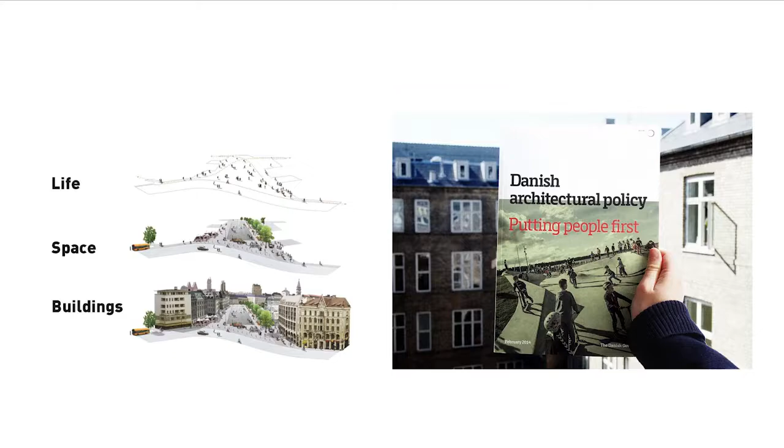A lot of that is due to Jan Gehl's well-known approach to city planning: life, space, buildings. It's important to say this isn't just a phrase for us, it's an approach now embedded into the first Danish architectural policy launched back in 2014, with the striking title 'Putting People First.' That really is at the core of what we do.

When we talk about architecture and not just city planning, it's always about city life or urban life - what kind of life do we want to create spaces for? Then we plan the spaces, and only after that do we start talking about the architecture of the buildings and how they can support the other two. Always in this order. If it's done the other way around, it'll never work. Trust me.

So these are three things at the core of everything our office does, and hopefully you'll see that today. The journey I'll take you on goes a little bit back, showing some projects from some years back, then touching on tall buildings, contextual tall buildings, timber, and finally adaptive transformation, which we're looking more and more into - not just us, but all of us in this room, since this is basically what most architects are going to be busy with for the next part of our careers.

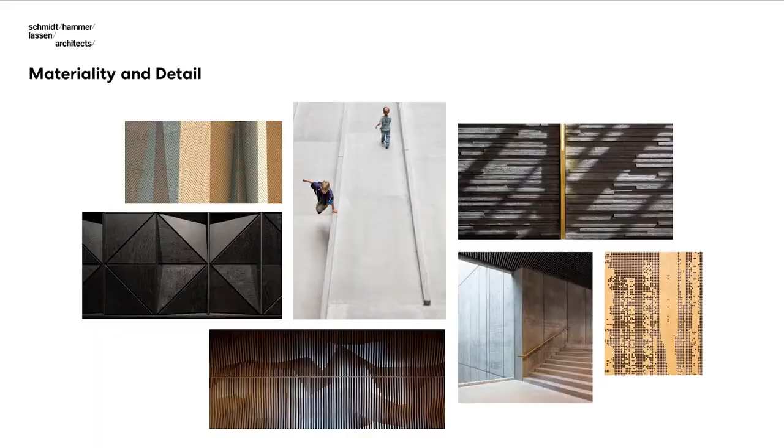I don't know if it's our Scandinavian upbringing, but one of the things I find hardworking here in North America is the split between a design architect and an architect of record. We truly believe the devil lies hidden in the detail, that architecture doesn't stop after the concept or schematic design, but needs to be brought all the way through to the very end.

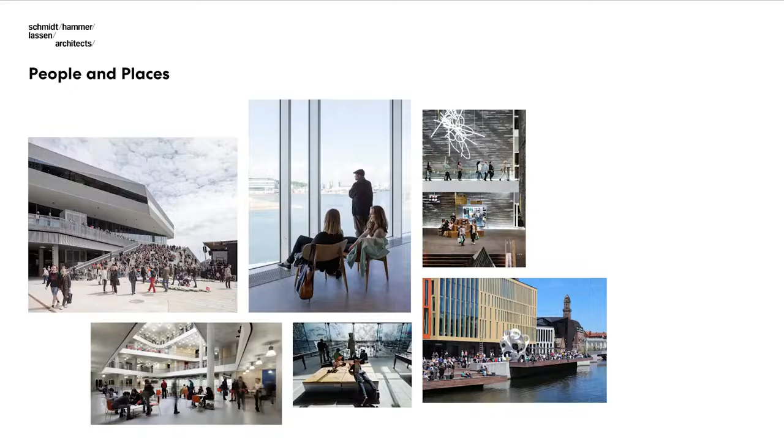And then, last but absolutely not least, the idea of creating spaces for people. As Jan Gehl again said, the good city is like a good party - it's where people want to stay a little longer. And the fact is that the biggest attraction for people, in the end, is other people - not architecture, not parks, but people.

So design as an ecology - this wraps up what I was just saying, the way we look at these different stages, both about social infrastructure and how architecture can become a means or mediator to create spaces that bring people together.

We say 'operational' here, but really we're talking about adaptive transformation - how can we work as architects within existing buildings and structures - and an environmental approach, of course, looking at new materials like timber, which I'll show is far from new, but actually one of the oldest building materials we have, and one of the most sustainable and long-lasting.

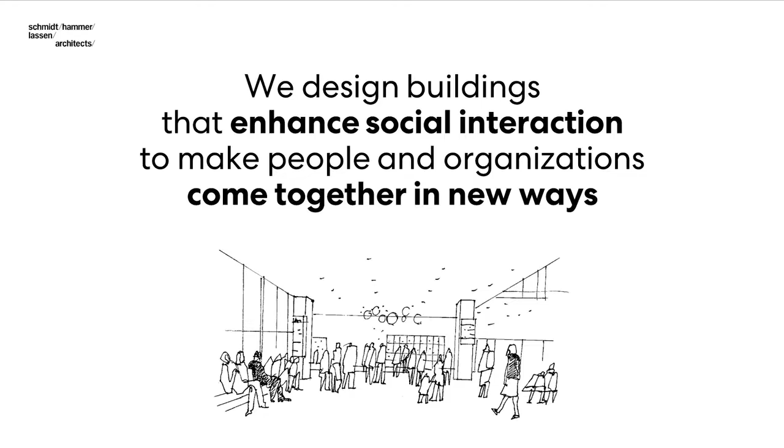So the first part here is about the social mediator, if you will - something we live by, the idea of using architecture to design buildings that enhance social interaction. That's what we want them to do regardless, as I'll show, of the building's function. So we work not just with cultural buildings, which normally have the advantage of being open to everyone, but also with private clients, trying to make them understand that by creating public spaces and interaction, they will also increase the value of their buildings, of their architecture.

Traveling back a bit, this is a project - a competition we won back when I just joined the company, one of the first projects I actually worked on: a competition back in 2000, the Aarhus Museum of Art, in the city of Aarhus, where we founded the company.

The competition was to create a new art museum - it was an open call with more than 300 entries. There was an art collection in the city that was far larger than the space they had, and our approach became very pragmatic.

There's the famous architect Arne Jacobsen's city hall up here and the park, and the old city park and the old museum. The site was right here, and most of the entries created a classical museum-like structure with a cascading series of rooms that one led to another.

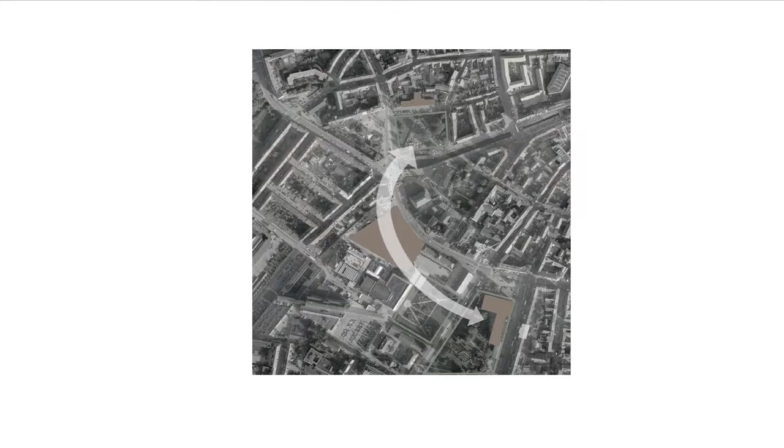We wanted to try something different and said, what if the museum became the mediator of urban space? So we tried to do the project as compact as possible. We went as low as we could, and as tall as allowed by the local area plan or zoning plan.

Basically we said, let's take a road and take it straight through the building, making it a public shortcut that goes through the museum. So we have this monolith that reflects the brick architecture you see in the rest of the city. It's kind of hovering, but it picks up people and takes them right through this street that cuts through the museum.

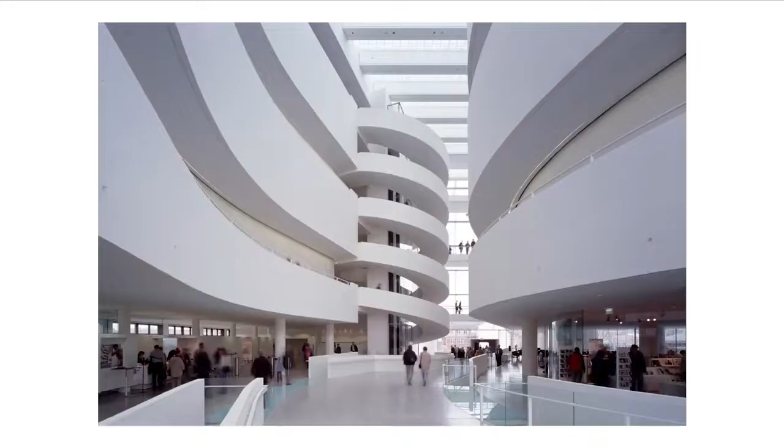So this is a free route, and the idea was that if we put public art on display along that route, it would create a space of interaction where people come in, see the art, get intrigued, maybe buy a ticket, visit the museum, sit in the cafe or bookshop. It became more than just this highbrow, elitist, culturist institution of an art museum—it became a cultural hub.

This creates the notion of people just passing through, people going into the museum, but also—obviously inspired by the light architecture of Frank Lloyd Wright and the Guggenheim Museum—the dynamics and motion of movement inside, people traveling from ground floor and up, also became part of what was on display inside the museum.

And when we won the competition, one of the ideas was also that we wanted to activate the roof and do some sort of sculpture park up there. At the time when the building was done, the funding was not in place.

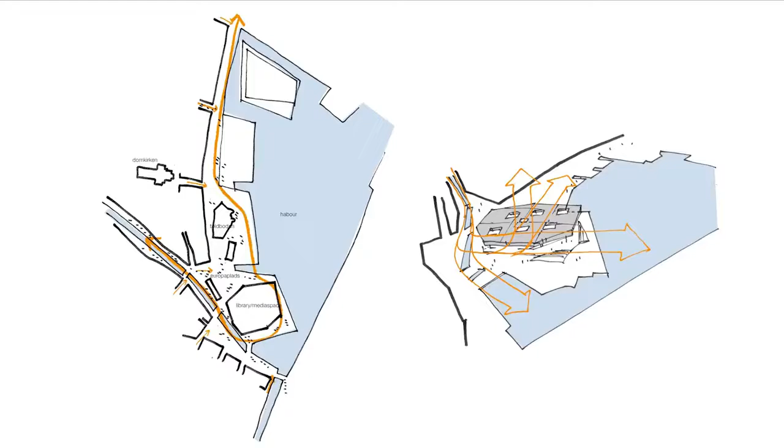So it comes in almost as this hinge where you come down and mediate the people that follow the stream down, right where the Vikings actually settled more than 1,000 years ago and created the city of Aarhus. It's like this hinge that takes people and turns them around both into the building and also looking out.

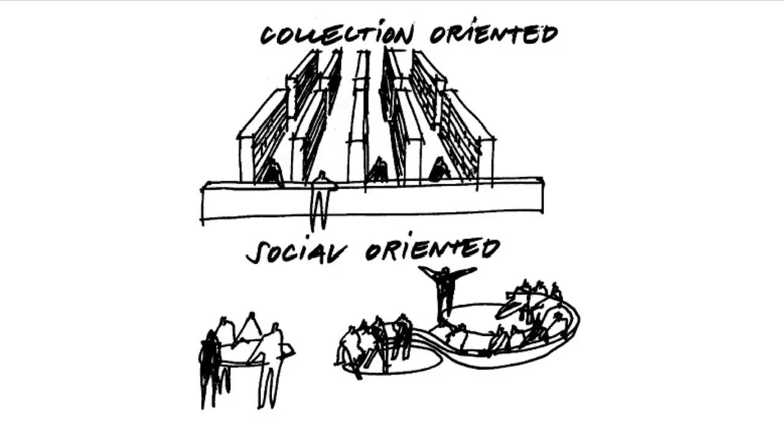At that time we already did a few libraries, but we took it to a new level, trying to go from this collection to the more social. As we say, as a catchphrase, from collection to connection inside the building as a more social oriented space. So here you see the harbor as it looked before, and here with the library.

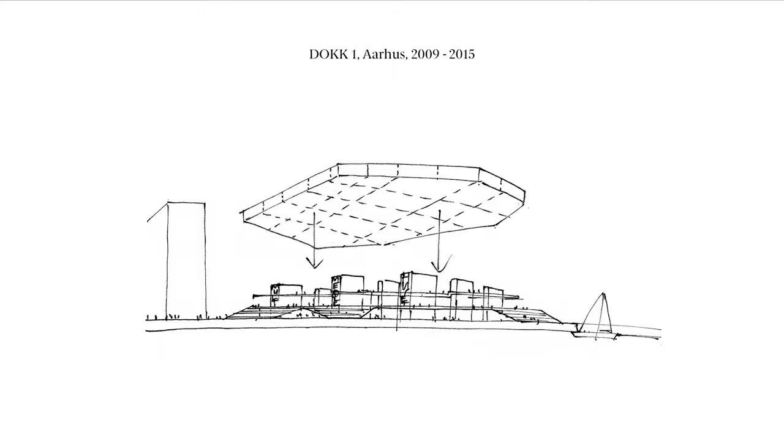It's really like this sandwich, this layering of different functions. We wanted to embrace the idea and contextually meet the kinetic structures of the harbor. So we saw the building as this huge covered market space.

So we have these 8 columns or cores that keep everything in place. Then all the slabs are just rotating around them, and then the big roofscape contains all the office spaces you see up there, in the sort of diagrammatic sections to the left.

Up there you have all the startup business spaces, the incubator space up top, then the big floating space in between with what we call the media ramp, where all kinds of activities take place.

And then below, all the public transportation, both with a new light rail, but also 600 fully automatic parking spaces. The idea was not to create more spaces for cars, but by doing that, we liberated all these parking spaces in the old medieval town.

So it was part of a strategy to say people who come in here on the ring road park the car and then walk into the city. So it becomes this hub where a lot of activities and functions go on.

As you will see, maybe also in many of our other projects, we always integrate art - here a piece called Magic Mushroom by Dragset and Elmgreen. So this big city turned upside down - it could look a bit like Calgary actually on its head, as a chandelier.

We had a few incidents there because people find it's a very nice Instagrammable moment standing there, but it's the same place where you actually have the cars going into the fully automatic parking - but no real injuries so far.

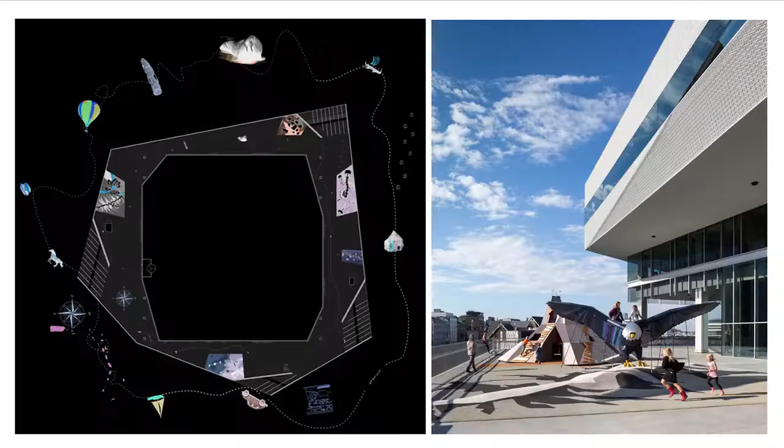Just looking a little bit around, we took the space, the playscape that sits around, and treated it. We wanted to make it also a learning-scape, so we treated it almost like a compass. So when you move around, you meet a gorilla from Africa, the Icelandic volcano, and a Chinese dragon. And here, side by side, the North American eagle and the Russian bear.

So today, almost taking on this geopolitical attitude of just bringing together nations playfully, kids come up there to explore the space and go in and learn about the different areas here. And here you see the library.

As you can see in the images, we kept all the colors, especially on the exterior, quite muted, very sandy and gray, to really meet the scale and color of the harbor. And then once you're inside, it's much more full of color, detail, wood, and all these kinds of details.

One thing that was very important for this project is how it was developed in extremely close correlation with the city, the citizens, the librarians, and everybody who was going to use the building afterwards. So the building as it looked when we won the competition and how it ended up looking, the core idea is still the same, but it was really developed in a tightly knitted feedback structure with the city and all the people who were going to use the building. This learning was something we also took to this building.

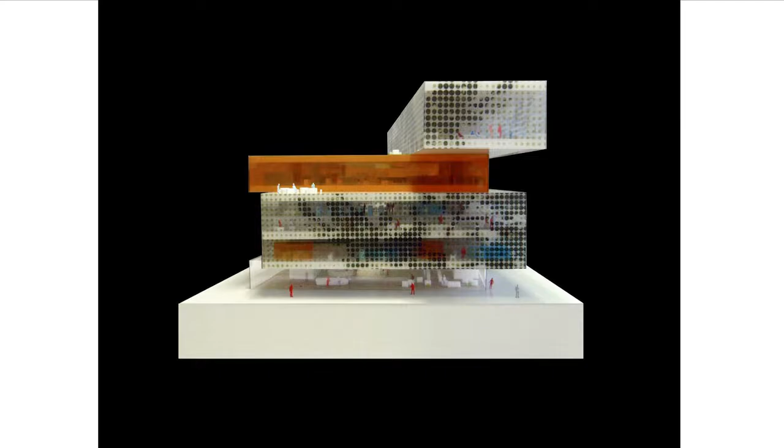And as you can see, this is how the building looks today. It's again speaking about context, and sometimes the approach can also be, at least in terms of materials, non-contextual, because we really wanted to do something here that was very different in its attitude to everything else in Nova Scotia, but it still picks up on the colors and the movement, and the public living room that sits on top is just pulled to one side.

That allows us to go taller than allowed, because of a little twist - there were some sightlines from the old citadel that had to be preserved, where they used to shoot guns at enemy ships, what do I know. But by doing that, we could actually liberate a bit more of the ground floor to do this little park in front of it.

And at night, obviously, the red spaces are where they have the old collection, and then we have all the new spaces below. And then just this fun little story - this dude here, this was the time where we also had sessions where we brought in kids to have their opinion of what a library should be like.

And at that time Harry Potter was kind of the big thing. So he said, why don't you do a library like the Hogwarts one? It's the best library in the world. So we actually decided to watch the movie and sort of took that as an inspiration - maybe this could be a space for us.

So it ended up having this notion, the whole idea of creating a space for serendipity, where the way in is not necessarily the way out. People sort of move around in the space.

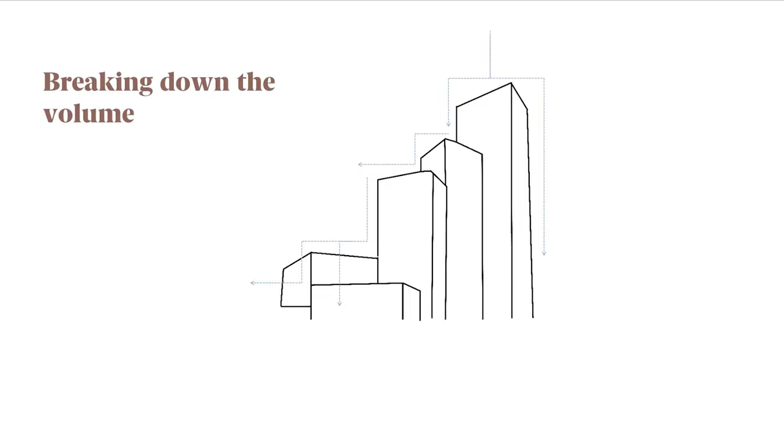But as this project didn't really have a front side or a back side, and was addressing many parts of the city, we wanted to break it down, so we created this cluster and pushed the logistics below grade. The loading dock became one of the clusters, everything goes below grade and up, and we pushed the lobby one floor up, so the whole ground floor is kept open and public. At the same time, we broke down the volume, using the first 5 floors as a mediator to address the other sides.

So what you see to the right is the hotel, the tallest part, which we broke into 3 little pieces to fit the scale of the city better. Then you have a restaurant, the conference center, the concert hall, and so on, creating these different spaces that mediate between different areas.

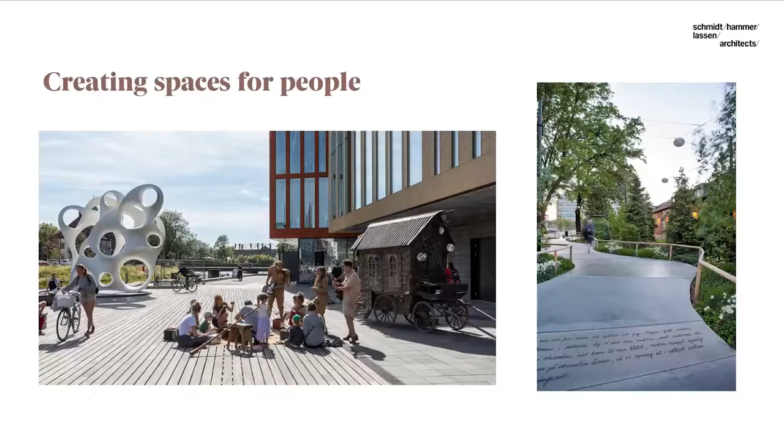The big boardwalk where you sit with this building in the back towards the waterfront, for the first time actually utilizing the canal in the city that was mainly just used for throwing in stolen bicycles, which we found when we were excavating it. But suddenly you have this space full of art and activities, and different green spaces coming around the building, creating a whole new scenery where before the project used to be a parking lot.

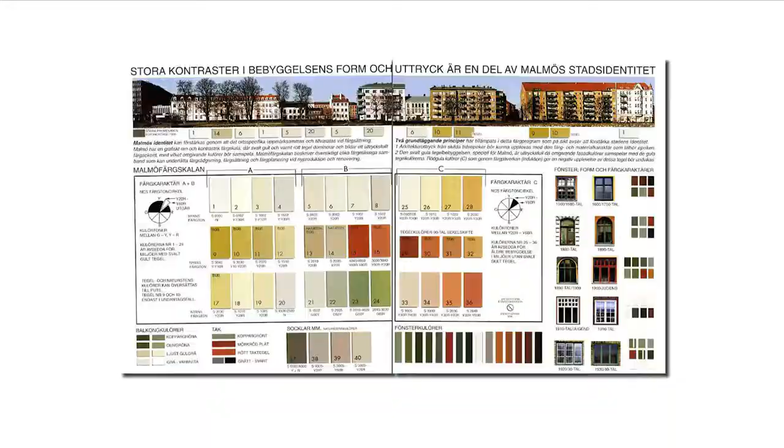For this contextual relationship, we started to study the colors of the city, finding that even though it lies only a stone's throw from Copenhagen, the color setting of the city is much more inspired by North German merchants. As I said in the beginning, Malmö was a strange city, not belonging to Denmark and not really part of Sweden, but almost this pirate's bay of the Hansestädter, the North German merchants traveling the Strait of Øresund.

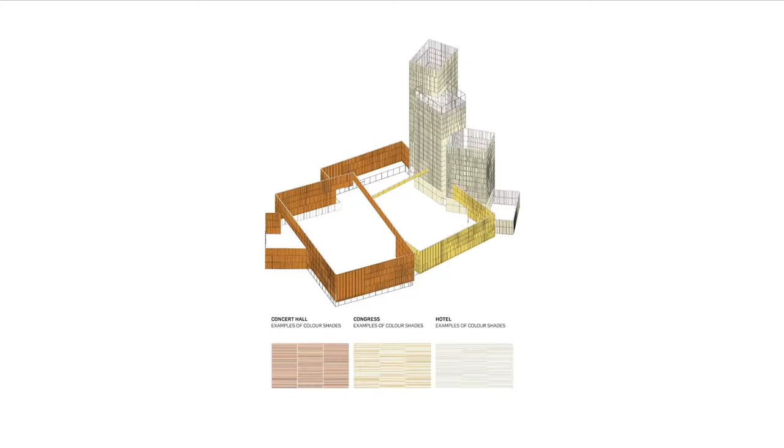So we tried to dress the entire building in these colors using 10,000 square meters of ceramic shingles, trying to capture the colors of the city. But we also wanted to make sure we didn't fall into the trap of creating a concert hall with a conference center next to it, but something that had the same uniform scale facade coming all the way around.

That kind of blends in with the city. So in a way, we wanted something that looked as if it was already there, and something that was never there before, at the same time. And then all these openings create a pattern that continues across the facade, creating this almost cobweb-like structure towards the canal.

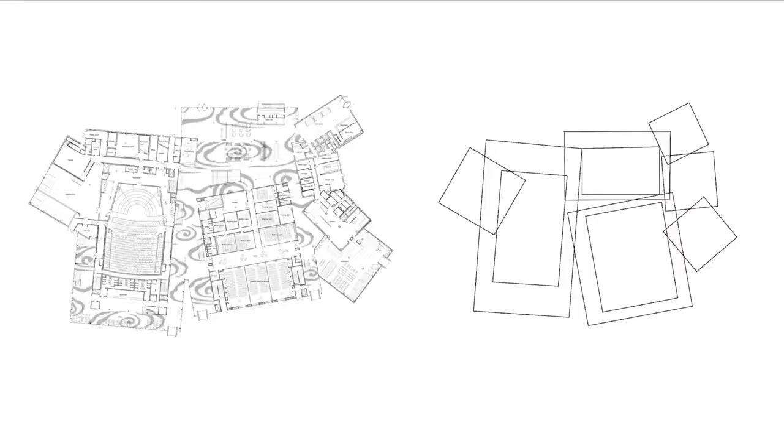And here you see the ground floor plan, but the same pattern with these sort of watery clouds. It used to be water filling the area where the little boats were, so we wanted to celebrate that, and how that's completely open.

So once you come in, all the big elements are cladded in these big prefab concrete elements to keep costs down. The different pattern in it creates this beautiful acoustic.

And here at one just opened recently, a project in the city of Oslo, trying to do a bit of the same, but with a very commercial building.

This building was standing on the site before. It was already beginning to be knocked down, so we couldn't do much to save it, even though that's something we want to do and like to do. It's a building that stands right in the city center, creating almost a fortress-like situation, becoming almost like congestion in the city.

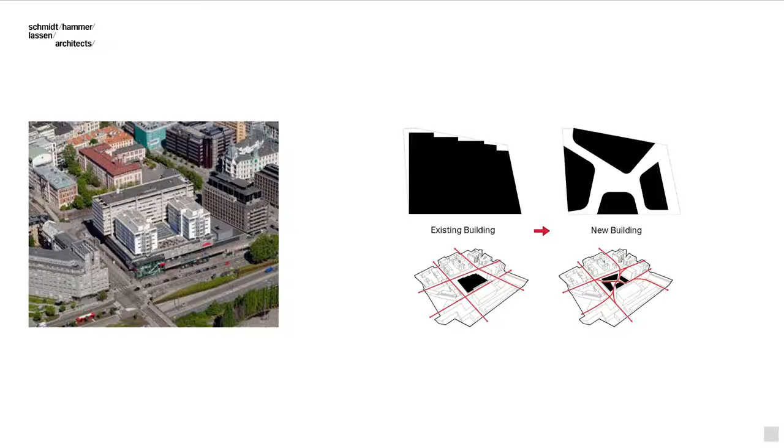So it was a competition, and the client was allowed to build the exact same amount of square meters that was there before, no more, no less, but they could redevelop the site as it was really poorly built and almost starting to come apart.

And what we said was maybe to try to excavate the heart of the site and create these new diagonal passages across the site, connecting some quite important parts of the city with a new public square that may not be big, but was something that was not there before.

And the reason why I show this as a contextual high-rise is it's above 40 meters, and everything above 40 meters in Oslo is considered a high-rise, and we are almost at 64.

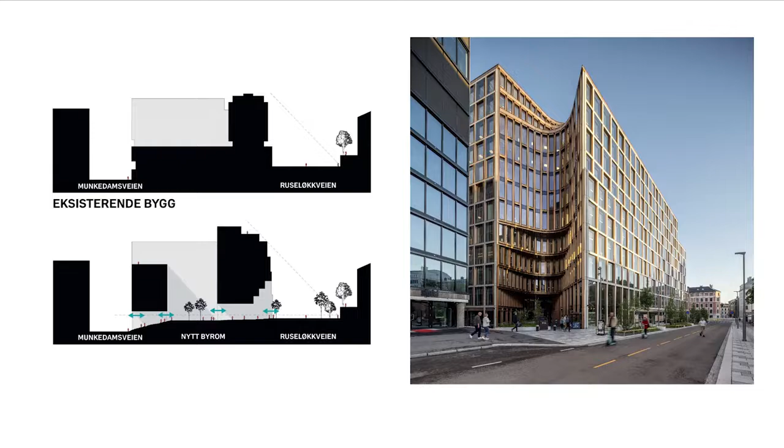But the way we do it is actually lifting it up and creating this access point where you go through, and at the same time pushing it back so it didn't seem as tall as before.

And then at the ground floor, keeping everything open, and also convincing the client that all of the office spaces should have their address towards the courtyard. Even though they wanted the outside, they wanted to be able to come in by car and walk straight in, but we created this space of activation.

So what are the challenges with the site? The site drops like 1.5 floors across the site. It's very sloped. We created this big stair that moves up again, that doubles as a sitting stair.

And you walk in, you have this big opening that we wanted to be like a little pond inside a clearing, creating a space that would evoke feelings, even though it was kind of tight.

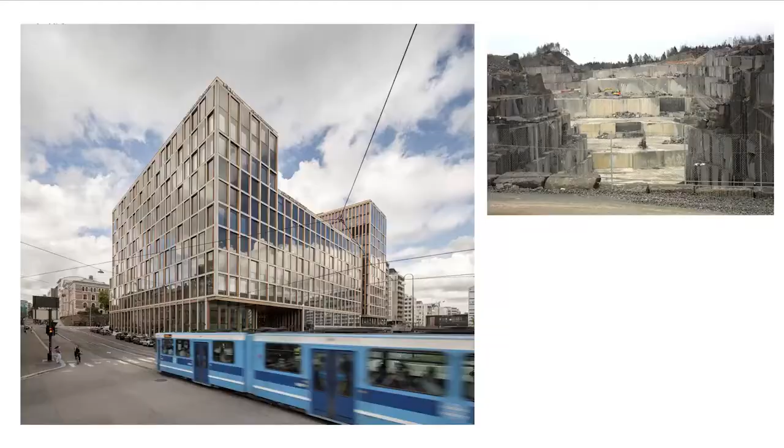So when you see it from the outside, the building builds upon this existing structure, with these gables where you see all the way down this ridge that you have in the city, almost like a stone quarry you'd find right outside Oslo.

So the facade is actually, and that's another lecture, how we deal with facade and U-value. It's the first huge closed cavity facade in Europe, which means 3 layers of glass, then a space that's always in overpressure, and then another layer, so we have active solar shading within that space.

Which is also what allows us to have this beautiful, playful movement of the glass, to depict the outside area where you have a residential neighborhood with windows always half open, half closed, and also to break the reflections of the facade.

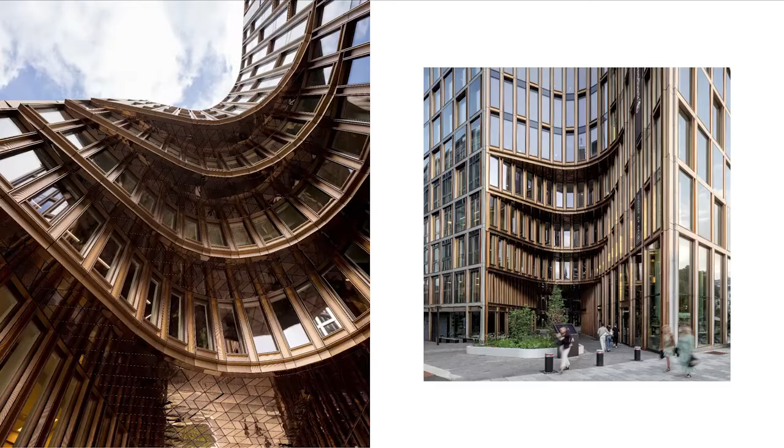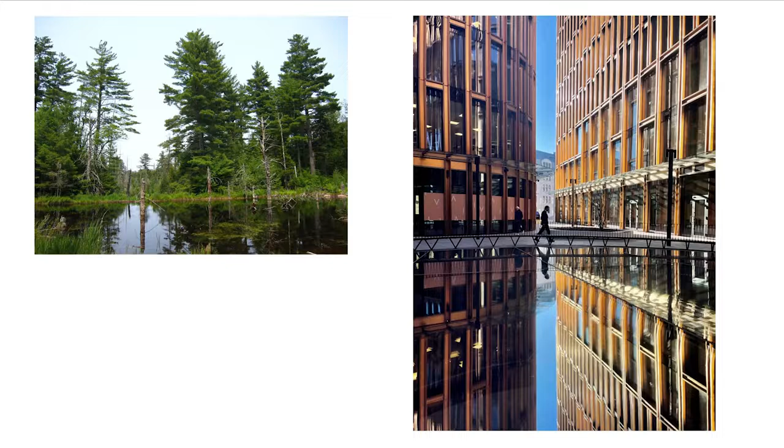And then you have these openings, and what we wanted was to work with this dualism: once you enter and move in, this is the stair that leads up. You have retail space, restaurants, and all kinds of public spaces on the ground floor. You come in and it reminds you of stepping into a clearing in a Norwegian wood.

You have the big reflecting mirror that brings daylight deep down to the retail spaces below, and then this extreme verticalism, almost like trunks of trees, when you walk in. People will always move from A to B if it's faster, so you have this motion and dynamic of people walking through the space. You have kids on skateboards blending in with the lawyers and bankers, who are obviously the only ones who can afford to live in a building like this. Then people going to eat and hang out at the stair, and the way it encapsulates and looks up upon the sky.

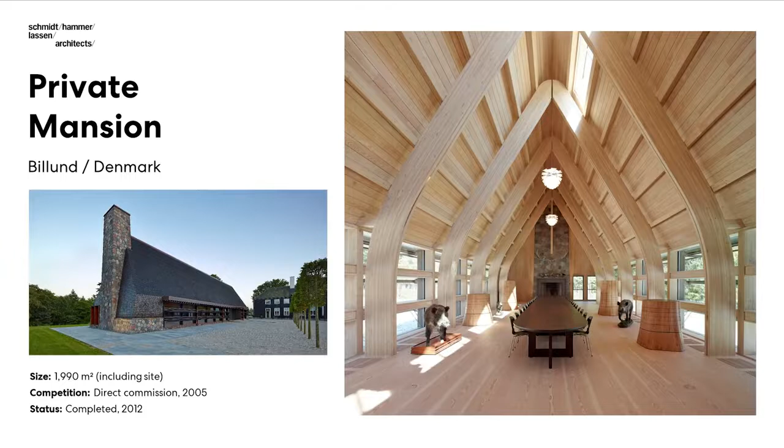We've also been involved in quite a lot of residential building. This is one we've done for a private client—it's the Lego family, but don't tell anyone. It's a hunting cabin they have, using glulam as main structure, but also elements of CLT to create the space.

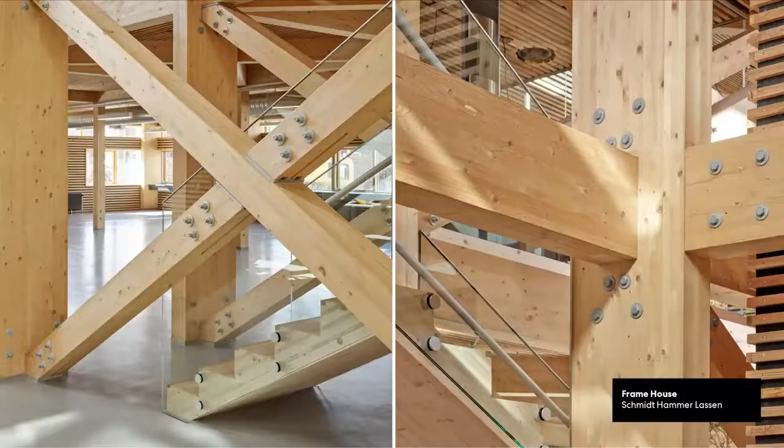A little before that, this is something we took into our own hands. We could see that even though we'd been working on projects like the Frigate Jutland and smaller mansions, the notion of creating office spaces in timber was still more or less non-existing in Denmark. So with a small group of clients, we came up with the idea: let's just do it ourselves and go all the way, incorporating the idea of design for disassembly, because wood, as a lightweight structure, has the capability of being built and taken apart again. So we came up with this idea we call the frame house.

The way we did it was we made a radius outside Copenhagen of roughly 30 kilometers, then investigated where the most one- or two-man companies existed, and that's where we wanted to put it, to create something where they could come rather than sitting home in the garage to work. They could come together in this flexible space.

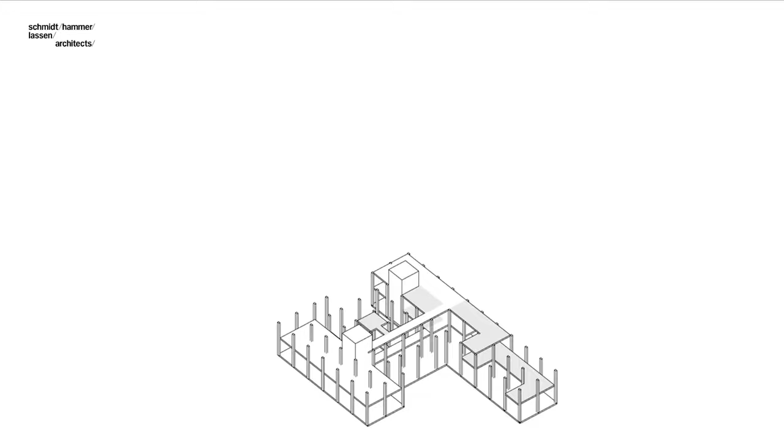The idea here is creating these platforms, basically like playing with Meccano or Lego. It doesn't care what it is, whether you build a rocket, a helicopter, or a motorcycle. It can be taken apart and put back together. The structure is completely flexible like that. This is the main structure of the building, what we call platforms, where the frames can always be extended and you can add lightweight structures in between.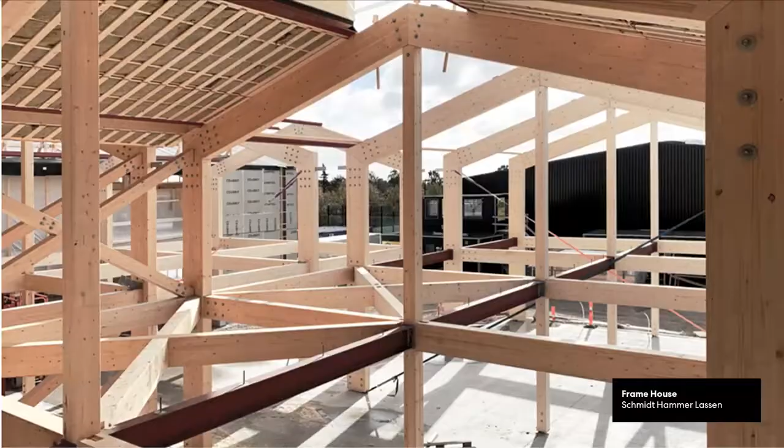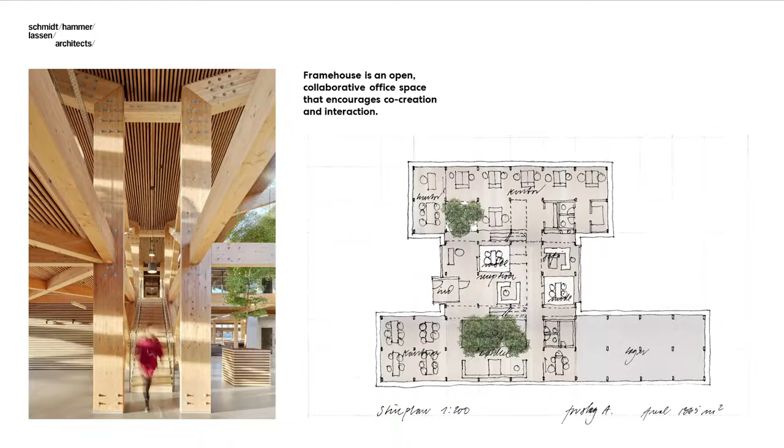Here you see it under construction, done extremely fast. All the frames in the frame house were made off-site, and it's basically just glulam. We didn't even use the new cutting-edge CLT components available today. We just built up the decks, filled them with wood chip as insulation, and then you have this really nice space. The fun thing is we go there a lot, not just with clients but also at the studio, because when you come, it's always a new space. They put up a new mezzanine, and last time they built three more frames to get more tenants in. It's become almost an organic approach to working with a lightweight product like timber.

And then, just to show this, these are my and all my fellow partners' summer houses, where we always work with timber—very Scandinavian, but very small scale. I use it as a segue to Rocket&Tigerli, because the question for us entering this international competition to build the world's tallest high-rise was not only to challenge and understand the system, but also to see how we could bring the qualities of the summer house into a hardcore, prefabricated, expensive, and difficult moon-landing-like project: a 100-meter-tall timber residential construction. So, going into the Rocket&Tigerli, which is going to be the world's tallest residential timber construction.

It was a competition we didn't think we'd get into, but we made it through the eye of the needle—8 companies entered. We set out, again with some learning from before, to work with something we could almost call the anti-tower, because the idea was obviously to do the tower, but also to do the smaller buildings. The reason it's called Rocket&Tigerli is the name of the competition, because of the site.

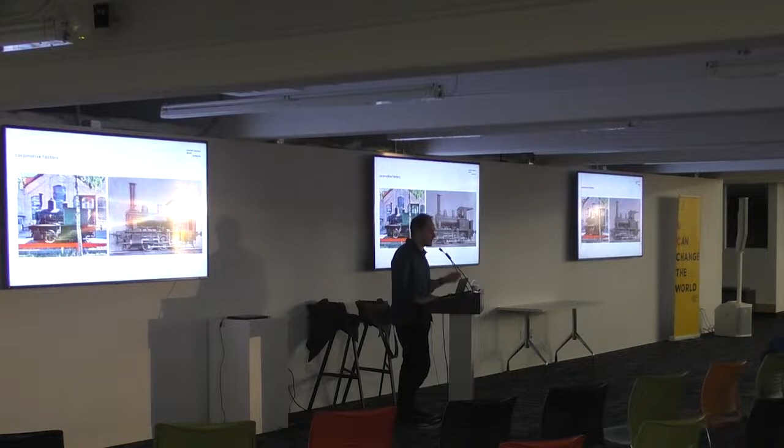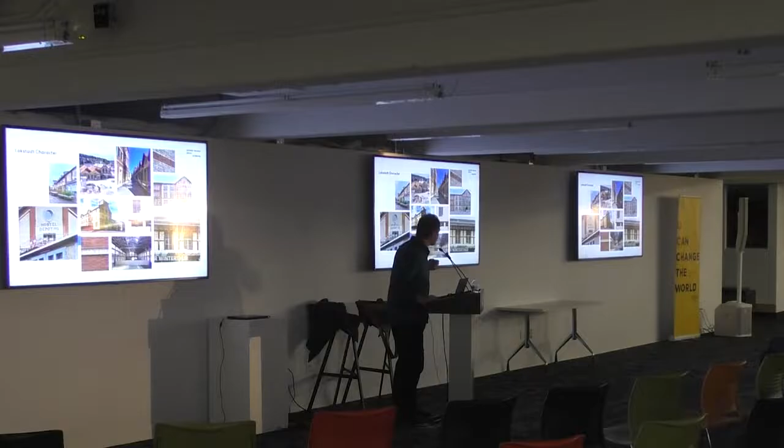This is in a place called Winterthur, right outside Zurich in Switzerland, and inside Winterthur there's an area called Lokstadt. Lok is short for locomotive, where they were driving or pulling the industrial revolution of Europe in the early 1900s by creating trains used all over Europe. So obviously lots of pollution, lots of coal, lots of factory—but also a place with character, at a time when industrial buildings were almost looked upon as our cathedrals.

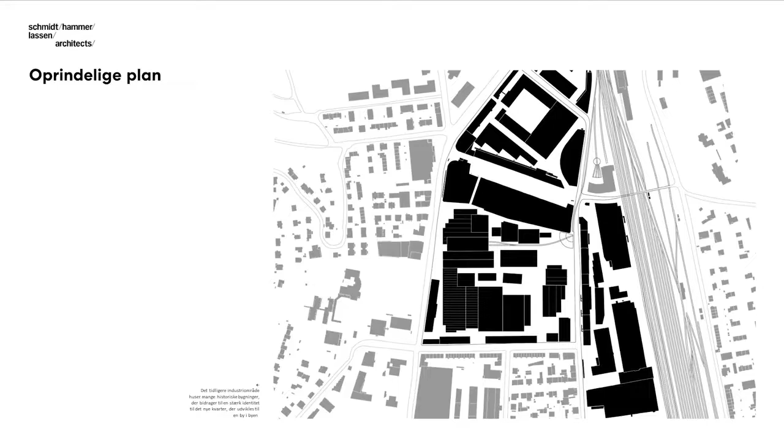A site and setting so rich and full of details. We started looking at the original master plan, and what's interesting about these post-industrial sites is this spatial hierarchy—it's almost like creating architecture without architects. The urban spaces, the way you move around through very narrow spaces, but also structures that take up an almost urban-like scale. So this is the new master plan, and our building is the little cut-up one here.

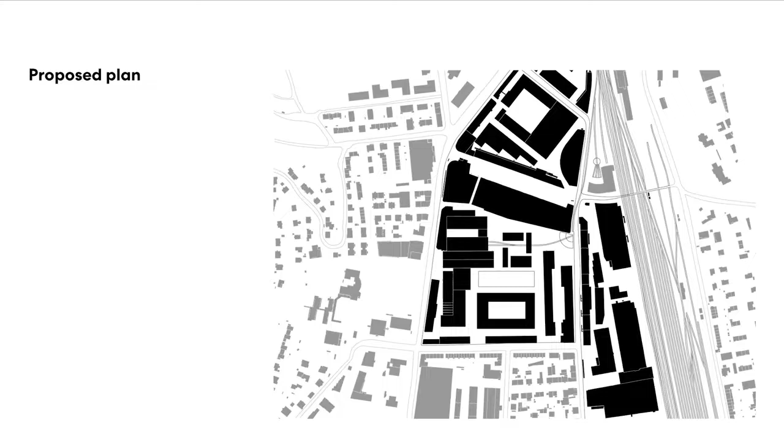But it didn't look like that in the beginning. Actually, there was already a master plan created by a local architectural office, Gigon/Guyer—some of you might know them, really good ones—that depicted a perimeter block with a tower on it.

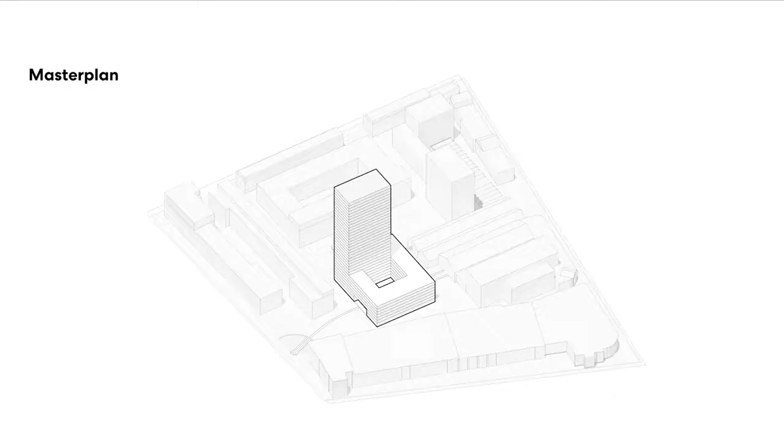And the only thing which we really liked was you can see there's a train track going through, that's why it's open. Part of the program was that these train tracks were to remain—there's this little turntable here where they still have one of the trains left. They have a cafe, and the idea was that the cafe should be able to move through the site and be where the sun was.

But the first thing we did was challenge the brief and say, okay, why don't we cut it up? We did this for several reasons—one was to try to talk about this industrial fabric, the way you always move from space to space, from something very narrow to something very open.

We also said, as a financial benefit, it's always good when you do a project and want to do something architectural to find some financial hook to hang your idea on. Here it was that we could use the more expensive tube-in-tube system—that I'll come to in a while—on the tower, and then use a much more conventional cross-laminated timber system in the small ones. At the same time, they could also do it in stages or sell off the different components.

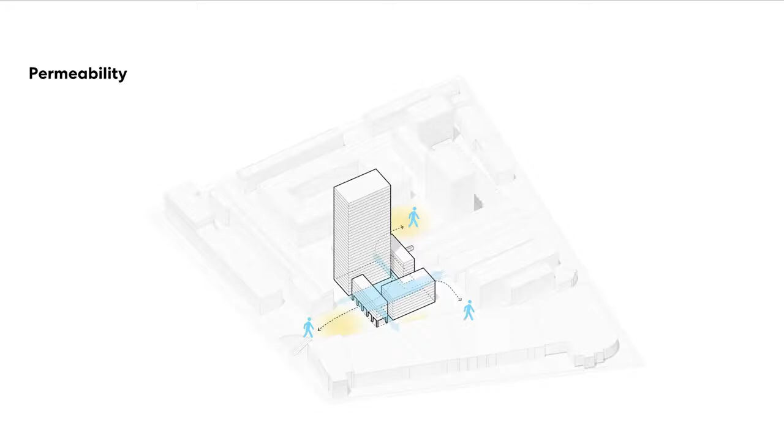Of course, creating something that evokes urban porosity, and even more importantly, also creates identity. So rather than having a high-rise with the most expensive condominiums and then just the rest as this fluid mass in the lower parts, we wanted them to have their own address, to build upon the idea of good city life—this is my city, this is my neighborhood, this is my building, this is my door. Rather than just living in a nameless perimeter, you created these four clearly distinctive identities.

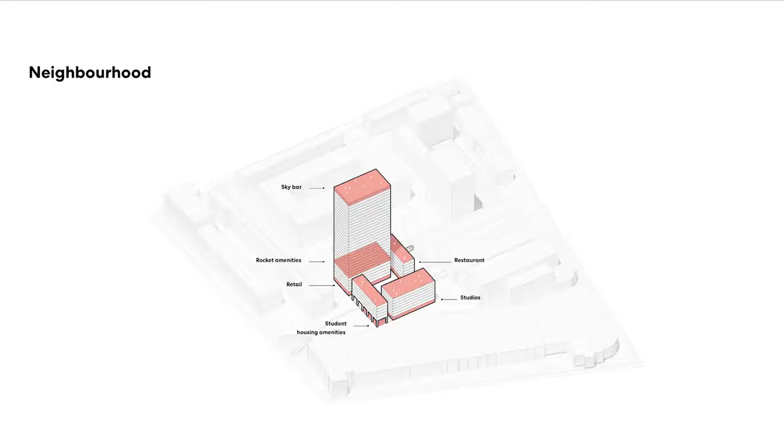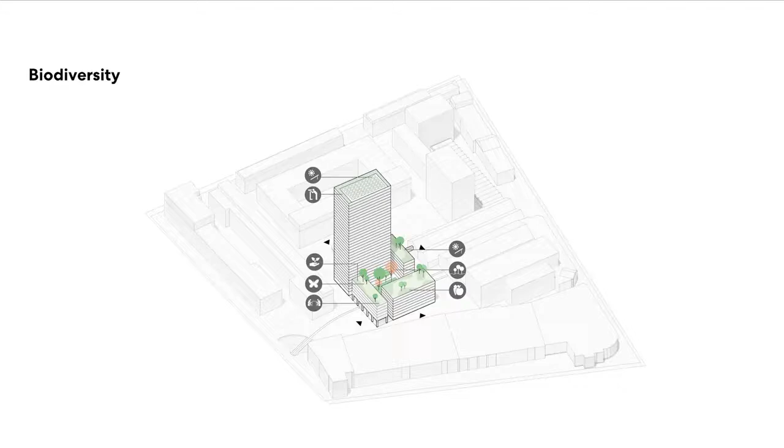Then we added all these areas of engagement, not just on the ground floor but also on the roofs, creating connecting spaces in the middle of the tower and on the rooftop—spaces for green space, biophilia, etc. And we put all the public spaces, the retail of the hotel, but also things like the bicycle repair place, the laundry, etc., on the ground floor.

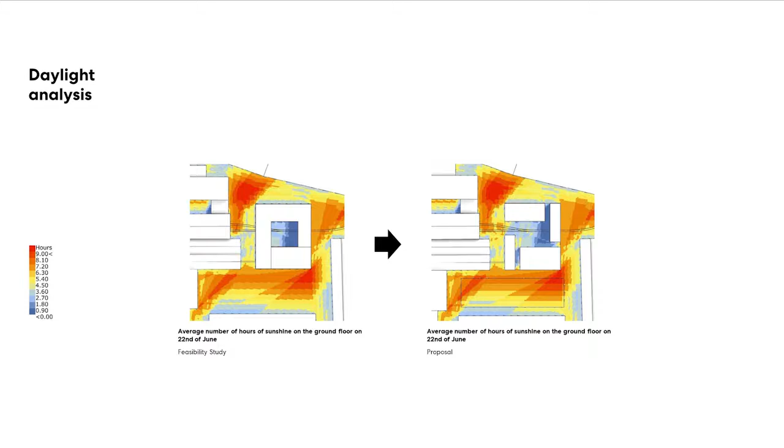And then the idea of creating this daylight—we did severe analysis to really prove that by doing this we would get much better daylight into the building.

But we also have this program—I'm not going to go too deep into it, but again this is something we developed ourselves. It's called Profiterole, as we say, it's the sweet side of profit, that we use to convince clients that what we do is a good idea. So this is what we have.

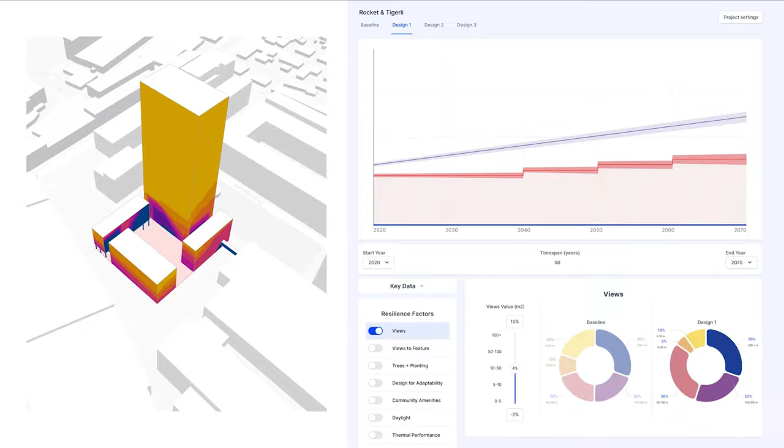With this software we can take all kinds of key indicators, not that we provide, but that we get from the client—how much is a window worth, how much is this worth. By doing that, we convince them that even though we cut it up and lost square meters, we reached the same amount, but had to be a little more careful, while getting much more value. We also try to value green spaces, the daylight that allows us to have trees all of a sudden—the courtyard is also worth something.

We also did extensive daylight analysis where we don't just look at daylight on the ground floor, but also all the light that hits the balconies across the day, so we could say people would actually come in and spend time in the courtyards.

And finally—this was quite interesting—from the 8 projects, one would think, given a master plan and a structural system, at least indications of it, you'd get 8 proposals that are the same. But basically none of us did—BIG, who also did a very remarkable high-rise here in the city, was part of it, 3XN amongst us—none of them did the same. So that straitjacket became so provocative that people tried to do their own style.

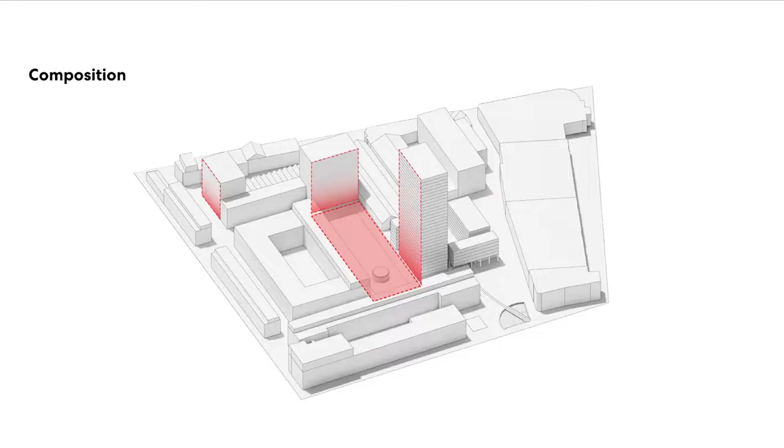We, however, tried to say maybe we could celebrate and use the structural system to our benefit and see what we could get out of it. So here's the idea of opening up, creating this space as a mediator between the already existing spaces, and here you kind of see how it goes through.

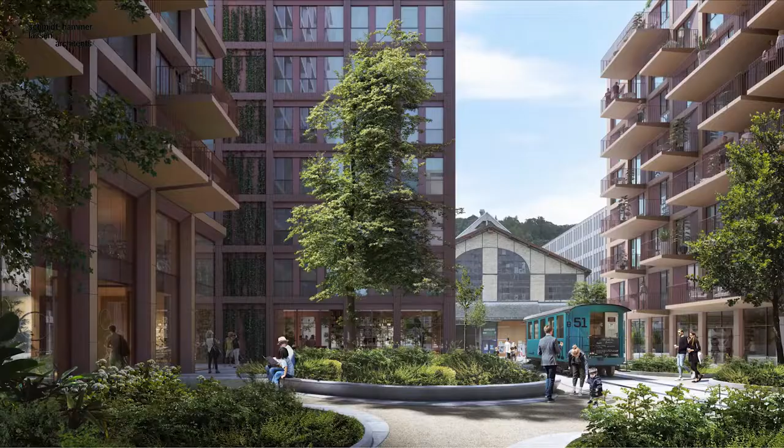You have the little train there, and what obviously happens, you can almost imagine that if this was blocked here, you wouldn't be able to see the old assembly halls, and all of a sudden it's brought in and it kind of makes sense. It's going to be a hotel in that space and restaurants, and that sort of becomes much more a part of this urban space here.

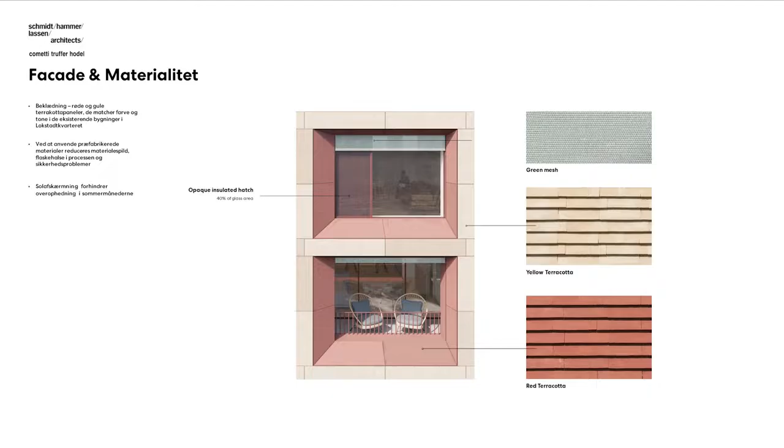Just some model pictures. So this also, like when it comes to the facade, the industrial character, this is going to be the facade components. We're working with this reclaimed brick shingles that we're cutting off. And as you can see, like the colors are kind of taken from the surrounding areas, the red, this thin yellow, and the green that you'll find inside the halls.

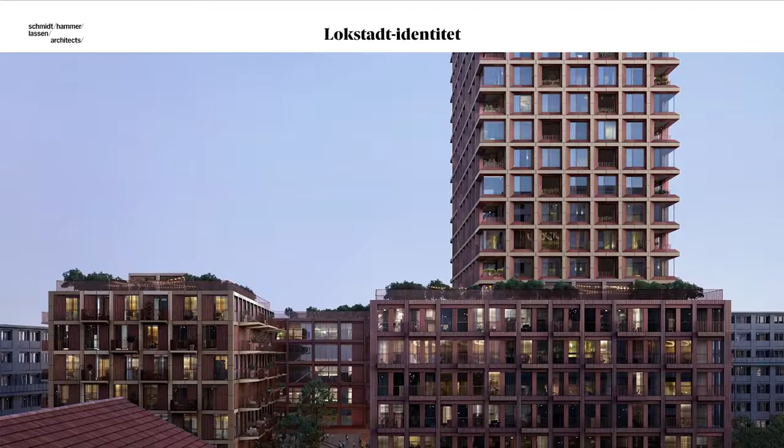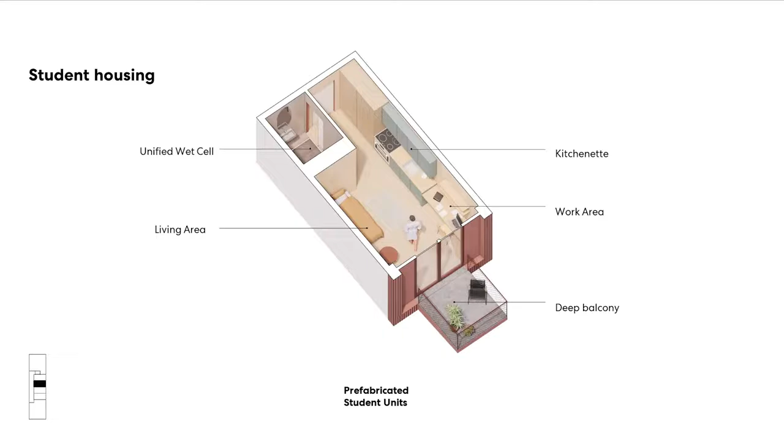And here you have the plans. I'm going to go a little bit quickly over here, but obviously one of the things we said, like none of the units should have daylight from just one side. So here you have some of the corner apartments, the student housing that we'll be doing by unitized system and lifting in. That goes for the hotel as well. And you sort of have the entire structure as we see it for all the components here. And the idea is actually to do this as a unitized system so we can bring it up.

And this is one of the good things, the many good things we can talk about by working with timber, is obviously also the time saving you have on construction. We could do it off site, come out and assemble it really, really fast, and then we close it with a rain screen. That's going to be this system.

You can see it has a chamfered component here. And the reason why we did that is like when we do a load-bearing structural system here, and this again, this is a complete shift. I'm sure that everything you have here in this city and most cities, when we talk about high-rise, it's curtain wall. We have a concrete slab and a column, and then we hang something. But here we're actually going almost backwards, and we are expressing the tectonics of the building and the facade. And we wanted to do that instead of hiding it.

But a beam that's like 90 by 40 can be a little bit bulky in the facade. So by doing this chamfer, it sort of gets a little bit lighter expression when you see the building from the outside. So the structural system for, I don't know how deep as we go, but I'm sure there are some geeks in the audience.

I'm not going to go deep, but it's this thing we call a tube-in-tube system. So it's quite different than cross-laminated timber. This is LVL, so laminated veneer lumber. So it's basically like really, really thick plywood, like pieces of roughly 3 millimeter beechwood that are glued together in these huge dimensions. So inside in the core we have like this one frames.

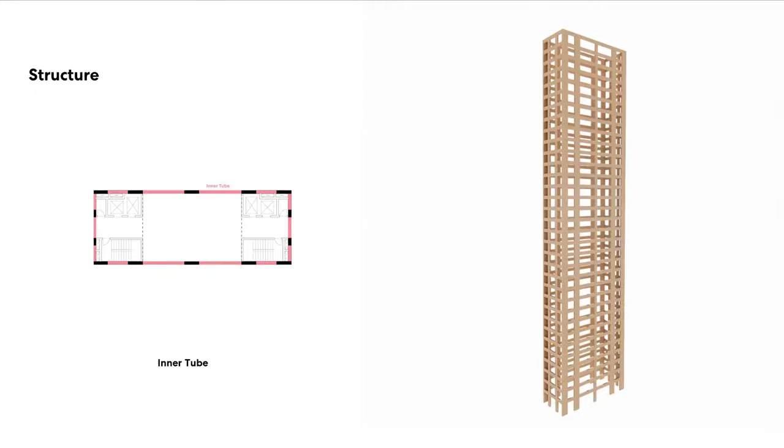That means the building actually doesn't have a core, it has a tube. So even the cores in the building are going to be done in timber. There's no concrete in the stabilizing system.

Then outside that we have these slabs. And these slabs here, it's quite genius actually. They're done as staying formwork. So we have a piece of veneer, again, or laminated timber. And then we have insulation in between and then concrete on top. So we use sort of the tensile qualities of the wood and the pressure of the concrete.

So this is the little bit of concrete. So when we talk about timber, it's not, we're not fundamentalists. Like we want to use it in the right places. But by doing this, of course, we can reduce size of the slab and thereby get much more daylight in, but also provide much stronger acoustic qualities.

So here you sort of see the middle layer that connects, where we've had a little bit of the insulation, and these are some of the testings. And this is obviously one of the things that's so great about this project, that we are already sort of 4 years into the project with all the initial testing.

And another sort of benefit of that is what you see here. This is how we anticipate the apartments are going to be, and obviously we're crossing our fingers, but we can leave as much of the formwork exposed as possible. So even though obviously it's a render, I know it's done by a render company, and the roof might be a little bit more rough, but we don't mind that, we just sand it down. You might see a little bit of the concrete dripping through.

Also on the walls, we can actually expose the LVL timber system to the inside, and have the benefit of the qualities that are within the wood, which is completely acknowledged and has been certified. I read that kids' heart rate drops in a day, by 8,600 heartbeats, by being in a classroom made of timber as opposed to anything else. So it just has this soothing, calming notion on human beings to be with timber.

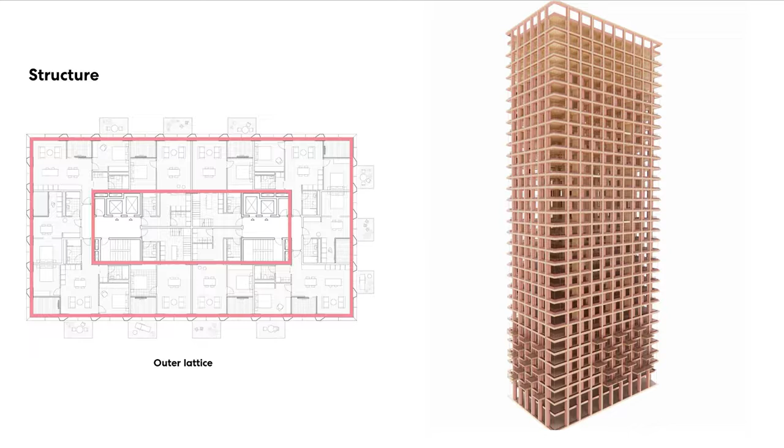So here's the tube-in-tube system with a different layout. Another thing we work with is being very organized around your cores, like our wet cells - the way we place them allows us to create this methodology of different units. So we can turn them in a north-south or east-west direction, but as you can see, the wet cells always stay in the same place.

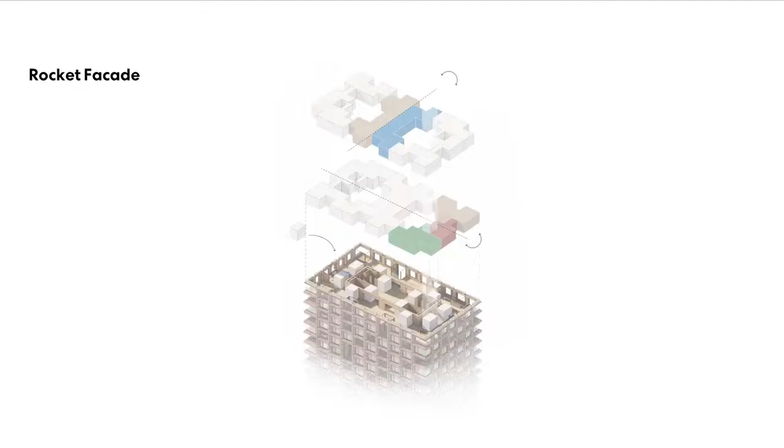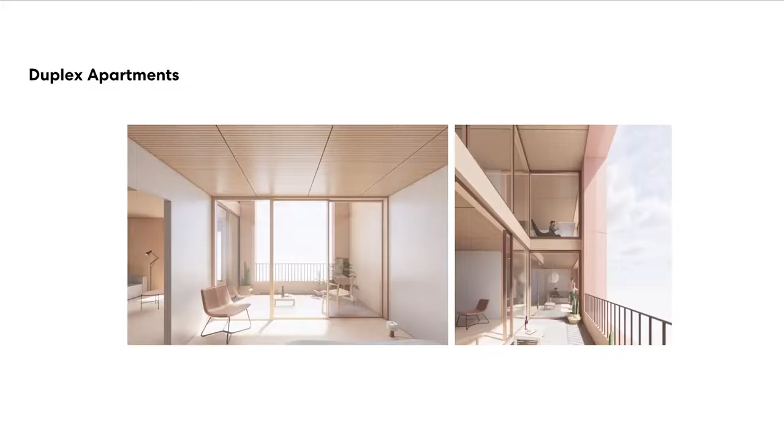So we have this system, as some of you might have noticed, we're actually working with two cores here. That allows us to have dual aspect apartments running all the way through, speaking to the idea of quality housing. You lose a bit of space in the gross-net relationship by having two cores, but each of the house units has daylight from both sides. Some even have double height spaces, and this is what allows us to have this quite interesting tetris-like motion, because we can shift around the balconies, shift around the apartments, instead of just having everything sitting right on top of each other all the way through.

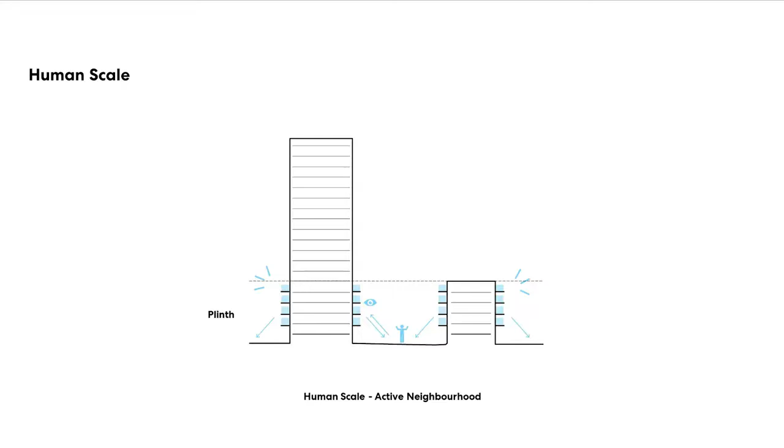Also using this methodology to create a strategy for the balconies on the ground floor, to create a much better connection to the people walking around. We have the balconies on the outside. This also pushes the beam to the lower part, and at the upper part we push the beam up - so instead of being a downstand beam, it becomes an upstand beam.

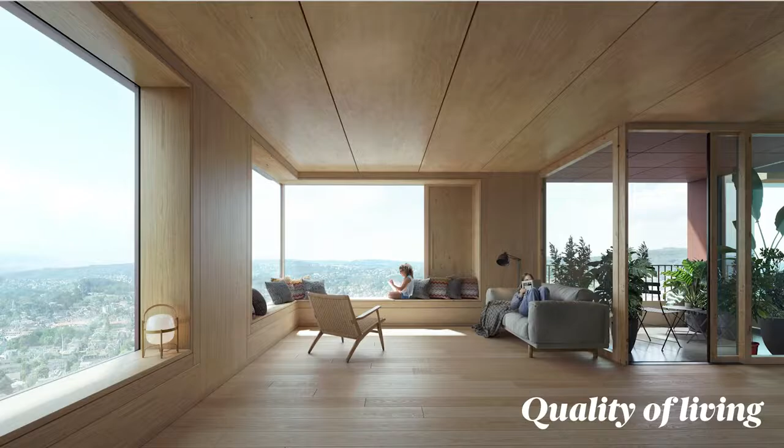So the beam suddenly becomes part of the living condition on the inside, even becomes part of the rail on the balconies to the outside. And then obviously at the very top we have balconies going all the way around.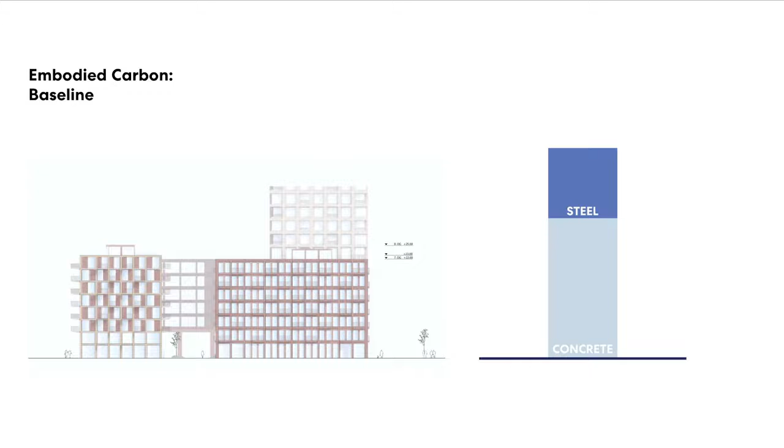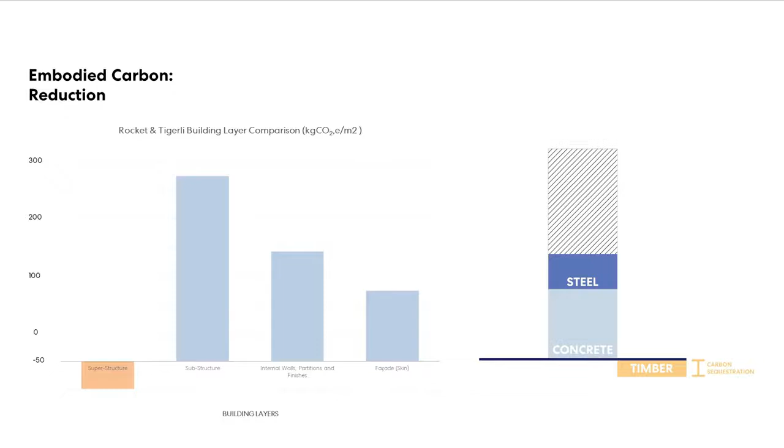Just some quick numbers - we calculated the embodied carbon baseline, and with this one we calculate to reduce the carbon footprint by 50%. As we know, every cubic meter stores approximately 0.9 ton of CO2. These are some calculations we did with the reduction of the structure, and here you can see it lies way below the RIBA and LEED climate systems.

Do we have time for the last chapter? Yes, all right. Yeah, because this is kind of summing it up - we're showing some examples of how we use the lightweight capabilities of timber in different projects.

These are just some sheer facts about the global emissions that come - I mean, that we as architects or builders, whether we like it or not, have an obligation to look at how we deal with structures, as we are responsible for almost 40% of all greenhouse gases that get emitted.

These numbers come from the UK GBC, the UK Green Building Council, and they're also saying that if we look towards 2050, 80% of all the buildings that need to be built have already been built. So in a way, there's very little for us to do as architects. So we could just wrap up and go home, find another profession, or try looking upon it in another way.

And finally, two small projects at the end where we talk about prosthetic architecture - adding something to an existing structure. Back to Toronto, Canada - a competition we were invited to do was looking at this entire plot, three plots, with these silos called the Victory Silos standing in the center.

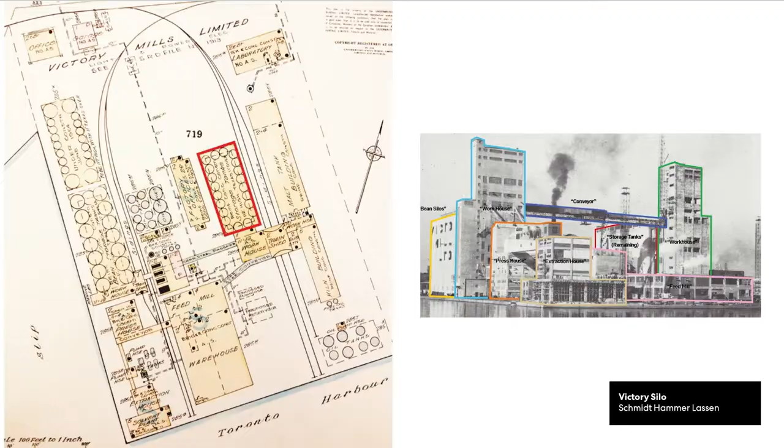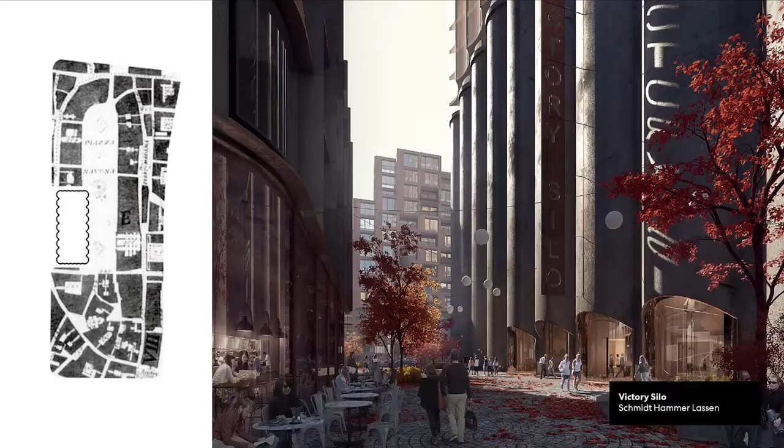And then we said maybe we can actually do the building. We were allowed to push it into the silo, but we pushed it away and recreated almost this alleyway and treated the silos almost like a cathedral. This is like Piazza Navona in Rome, maybe, because even though Toronto says it's the city in the world with the most neighborhoods, the one area you don't feel the feeling of neighborhood is down by the waterfront. So maybe this could become it.

So our approach was almost this yin-yang strategy, saying that something that's convex could be concave, light, heavy, concrete and timber. So we suggested doing this lightweight pre-manufactured structure on top of the silos that could be a hotel or restaurant, keeping the space where the old head house was intact in between.

A project that we just won in Oslo, and also it's kind of the knowledge that we use sometimes to push a little bit against the brief. So this is a bank in Oslo. They own these 2 buildings, the ones you see here. This one here done in 1971 and this one in 1939.

What they asked us to do was actually to create 2 towers. They wanted 2 towers, and we were already like, haven't you heard? People don't want to be in towers anymore. But they really wanted it. One in the front that could be 100 meters tall because of geotechnical conditions, the bedrock is higher there, and the one in the back in the 1970s building could only be 70 meters tall.

So the result of that would basically be this, where you just hammer 2 towers into the existing structure and end up getting this structural Frankenstein monster with 2 towers that were not really efficient and would also destroy the 2 existing buildings.

So we started to look a little bit closer into the integrity of the building. The thing is we found, as you may know, buildings done in the 60s and 70s are many times over-engineered, at a time where materials were super cheap and engineering was going up, so they can take way more load than they're actually built for. The other building, however, the one from the 30s, had like 220 to the ceiling height and was in really bad shape.

So our strategy became to actually take the 1939 building apart, and keep, like a material bank, all the good stone. It had this really, really good red Norwegian granite that we could reuse. Then keep the 1970s building and build on top of it with a lightweight timber structure.

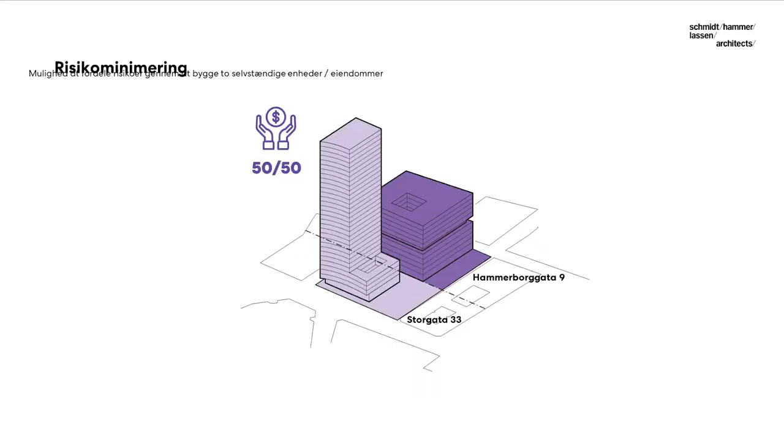So we'd actually get a structure that looked much more like this - a tower to one side and then another building to the other side. One of the arguments was that you could save money by doing it, but also you'd have different offerings to tenants rather than having two towers that would be the same. You'd have deep floor plates for a multi-tenant office with an atrium building and a tower next to it.

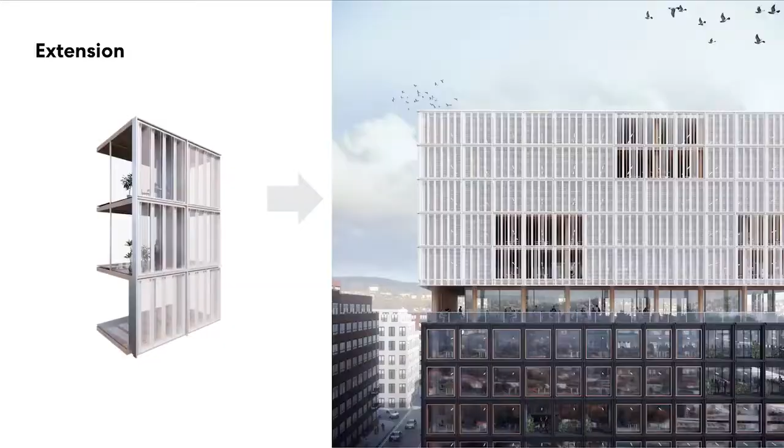So we're going to build an extension on top of it and then redo the lower facade, put in new windows. And so we got this whole equation that would be adapt, extend, reuse, perform, and give back. Because by doing this, we could actually put in more square meters.

And in the end, this is obviously what we always intend to do - one of the biggest challenges for this area was not just the client's wish to get more square footage. It's in the part of Oslo with the least amount of green spaces. So setting back would actually create all of a sudden a new green space, but also become an open extension of the lobby.

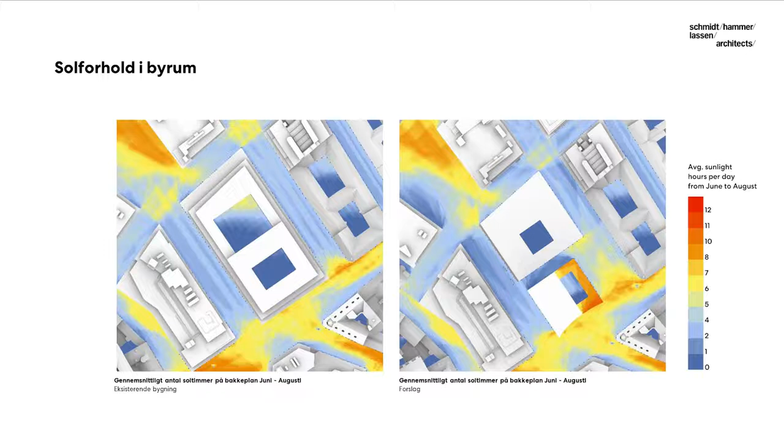So to the left you see the tower, and to the right the timber extension. Again, using solid argumentation by pushing back, you can see how this square could actually become quite a nice daylit space in the heart of the city, where we could extend the period of daylight from 3 hours to around 6 to 7 hours. And the way we organized it, also looking at wind conditions - turbulence and high rises obviously go hand in hand.

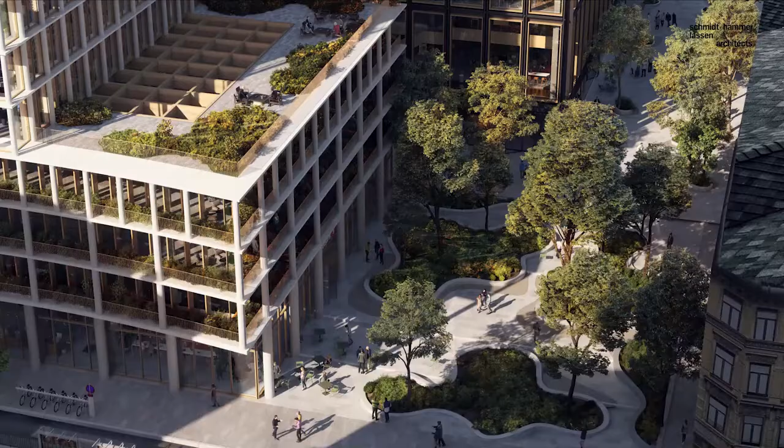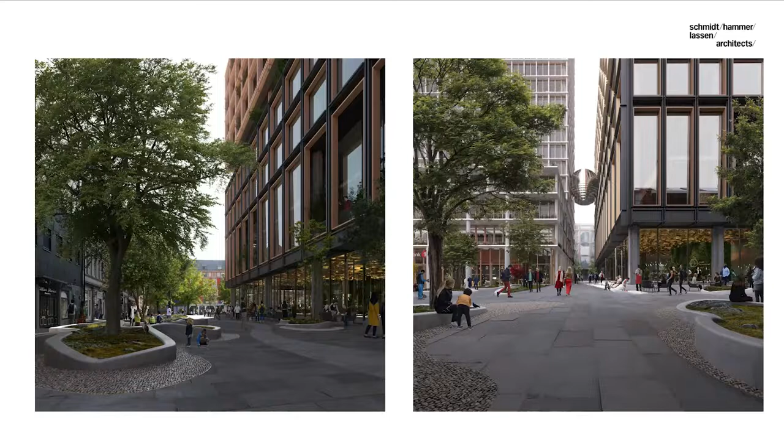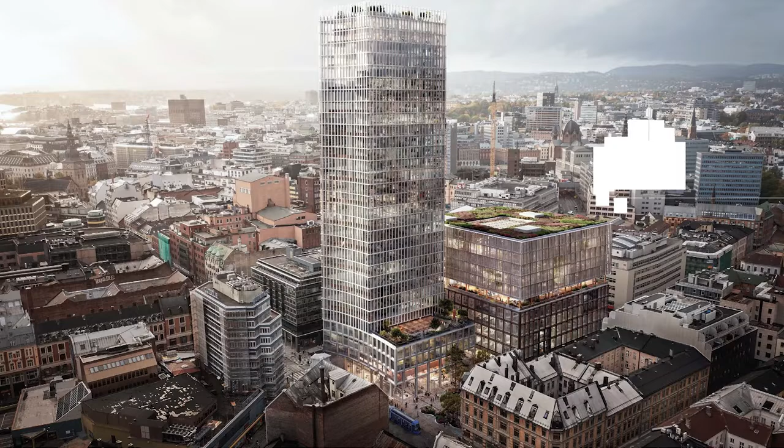So here the little green space around, and you see the new lobby where the red stone has been reused in all the interior spaces inside the bank. And some new urban porosity that goes around the buildings, creating this little art piece that would become the bridge between the two structures. Here you see the two buildings next to each other with the two facades, and here an aerial view with the new setting.